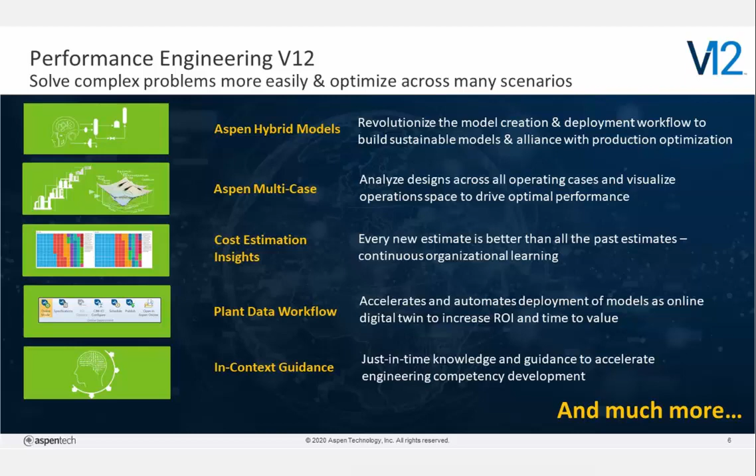Another revolutionary capability is the in-context guidance that provides users access to best practices and tips and tricks that are relevant and helpful to the specific task that a user is trying to accomplish from within Aspen HYSYS or Aspen Plus. This, we believe, will help further accelerate competency development for our users. And again, these are just a few of the innovations. There are very many in the V12 release.

Now, let us take a quick look at a few of the challenges faced by the process industry. One key challenge is the ever-increasing need for greater collaboration between the dispersed workforce and the need for better information sharing between design and operations. There is growing pressure on productivity from increasing market volatility. Now, these two challenges, of course, have heightened further with the pandemic.

Another major challenge for the industry is the impending loss of knowledge and experience as a large segment of the senior operations staff retire from the workforce. And finally, there is the increasing challenge of maintaining competitive edge while achieving sustainability goals. These long-term and short-term challenges can be effectively addressed by harnessing the power of artificial intelligence.

And AspenTech's approach to enabling you to leverage this power is by embedding artificial intelligence in our solutions so you wouldn't have to do it yourself. These solutions use the data from across your processes and assets and then apply a combination of data insights techniques and domain expertise to deliver deeper insights into your processes, give guidance for better decision making, and automate your workflows.

By data insights, we mean various machine learning and advanced analytic technologies. Domain expertise involves first principles engineering and about 40 years of AspenTech's real-world expertise in solving process engineering challenges. This results in a fit-for-purpose, domain-specific AI-enabled application that really delivers measurable returns. And this is really what we mean by industrial AI.

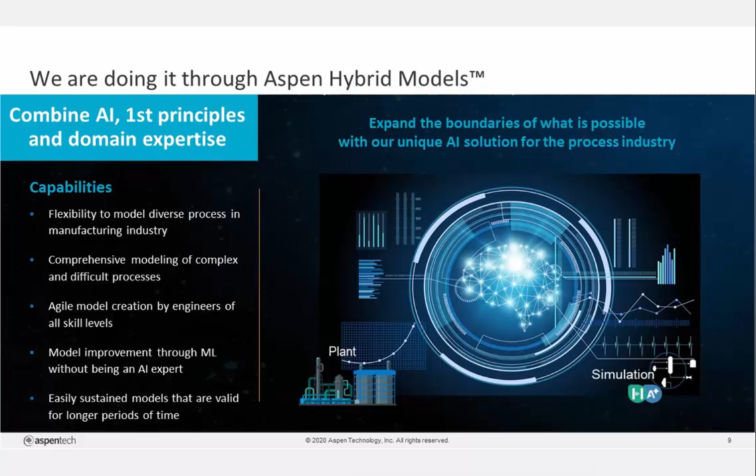Now, let us take a deeper look into what really are these new Aspen hybrid models. One good way to understand the hybrid model is to first look at the conventional pure first principles based models. First principles meaning models built based on the fundamental physics and chemistry of the process. These refer, of course, to the conventional process simulation technology. As we all know, this technology requires some expertise to use and requires some time and effort from the user to create models. In certain cases, they may also prove to be insufficient in modeling certain niche or complex processes.

Now let us look at the pure machine learning based models. These models, on the other hand, require a tremendous amount of good data. Unlike first principle based models, pure machine learning based model predictions may not conform to real world physical constraints and principles of mass and energy balance. In some cases, these models may also be hard to interpret.

Now, this is where hybrid models come, combining the best of the other two modeling technologies. It brings together AspenTech's decades of domain knowledge, the first principles-based modeling techniques, and at the same time, it brings in the machine learning and AI technologies to overcome the limitations of conventional simulation technologies. So this is how hybrid models enable development of self-sustaining fit-for-purpose models that can be used with confidence across an asset's lifecycle.

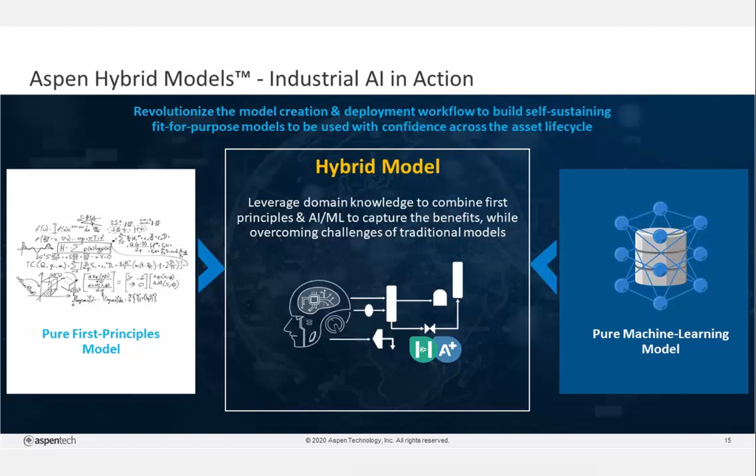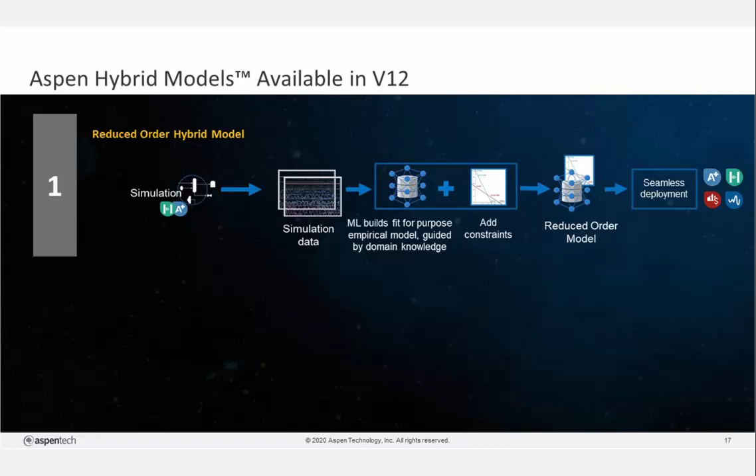In V12, we are enabling users the option to develop two types of hybrid models. The first one is what we call reduced order models. As depicted in this slide, the models use simulation data derived from simulation models in either Aspen HYSYS or Aspen Plus to build machine learning models that are guided by AspenTech's domain knowledge and constraints such as mass balance checks. These reduced order models have the required agility that makes them perfect for deploying in Aspen HYSYS flowsheets, for developing plant-wide digital twins, or developing accurate nonlinear planning models, which can be deployed in Aspen PIMS-AO.

The second type of hybrid models are what we call AI-driven hybrid models. These models can take in data from a variety of sources, such as operations data, lab data, pilot plant data, or simulation data. Like before, this data is used to develop machine learning-based models that are guided by AspenTech's domain knowledge and constraints such as mass balance checks. In addition, these models can leverage first principles to compute parameters so that they can augment the data pool.

These models are ideal for deployment in Aspen HYSYS flowsheets for simulating complex processes that cannot otherwise be simulated today using conventional simulation technologies. They can help as inferential sensors for properties that cannot be predicted by process simulators. And more importantly, they can be used as digital twins for operational decision support. As you may have inferred by now, Aspen hybrid models deliver deeper insights into both processes and equipment using the power of AI, which is not otherwise possible using conventional simulation technology.

There are very many real-world use cases where this technology can help you significantly. This includes accurate and robust reduced order models for both engineering and operation support. They can help develop non-linear reduced order models that could be used for updating your refinery planning models. And as I said before, they can act as virtual sensors for KPIs. And most importantly, they can help develop robust, large-scale site-wide models.

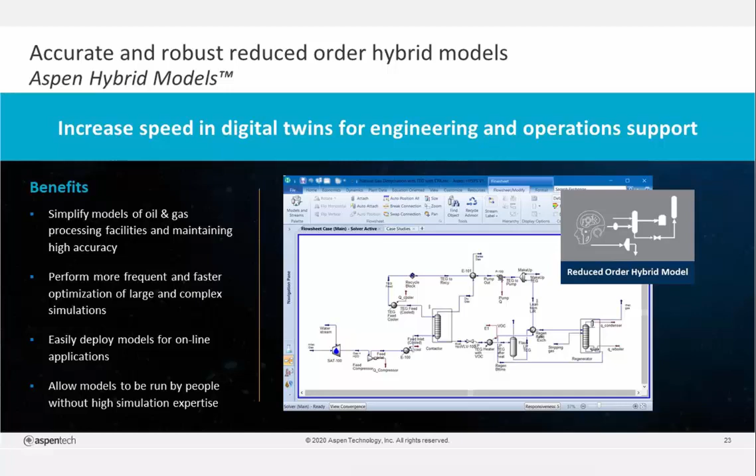So for this given application, we worked with a number of different companies, and this is just a sample of some of the work we did with a large American multinational company, an energy company. And the challenge they were facing was there was a significant amount of effort needed to calculate all of these different gas allocation calculations. It's a very complex model. It takes significant time to solve, and it required a very high level of expertise to do this kind of work. And overall, they were trying to reduce some of their energy use and improve the overall sustainability.

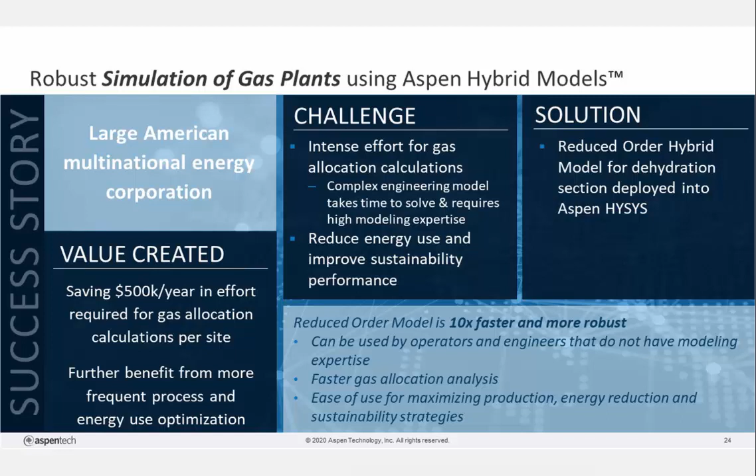So the solution we came up with was a reduced order hybrid model for the dehydration section within Aspen HYSYS. So we built a reduced order model that could be deployed back into the engineering case. And as a result of this, we were able to save about $500,000 a year in total effort required for performing these gas allocation calculations. And we gain an even further benefit of this by allowing this process to occur more frequently. And since this is a very streamlined, automated, and relatively easy workflow, we can do this type of activity really as frequently as we like. And this underlying reduced order model is 10 times faster than the initial simulation case, and it's also more robust. So you get additional benefits through that aspect as well.

Now, the workflow for actually building these, which I'll show you in the product in just a minute, starts first with the data collection and the data definition. So what we're ultimately doing is building a reduced order model based off of an existing simulation case. And in order to build that reduced order model, we first need to have a data set that represents the full operating range that I really want that model to represent.

Now, we could generate that data in a number of different ways. We could take our existing simulation model and run it through, for example, the case study in HYSYS. We could potentially use ASW or other tools. However, we have a brand new product called Aspen Multicase that makes this process very, very simple and a lot quicker and a lot more straightforward. So I'll show you what that looks like in the tool.

But what Multicase allows us to do is not only perform this in a more streamlined and easy manner, but also take advantage of high-performance computing, run these different cases in parallel, and also helps to set up an intelligent design of experiments to make sure that for the range that I define, I'm really getting adequate representation and sequencing the cases in a very efficient and in a very intelligent manner so that I can do this analysis as efficiently as I possibly can.

Now, once this data definition and collection is complete, I can take that model, or all of that data, into my AI Model Builder to perform the hybrid model building steps. So the Aspen AI Model Builder is our brand new product we just released with version 12 that allows really the building, the data cleaning, the validation, and everything else needed to build and eventually deploy one of these hybrid models.

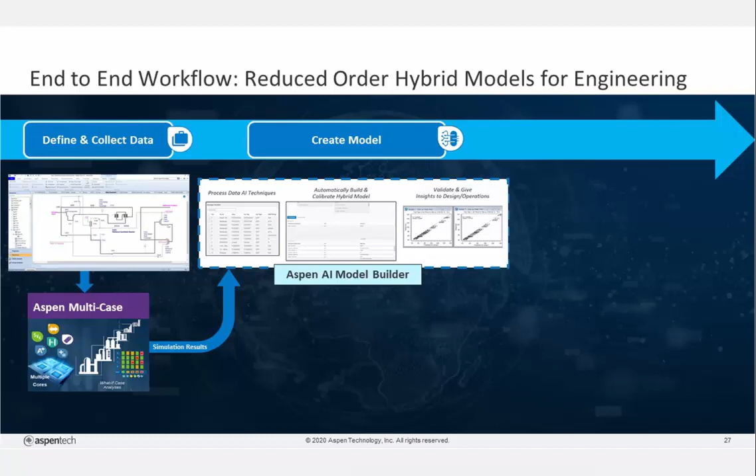Once we finish the model building and the model validation step, we can then begin the process of exporting this model and deploying it into a given end product. So here we'll be using this model within Aspen HYSYS, but you could also think about using this model perhaps in Aspen Plus or online, or as you'll see in another demonstration, how we can also deploy it into the planning world.

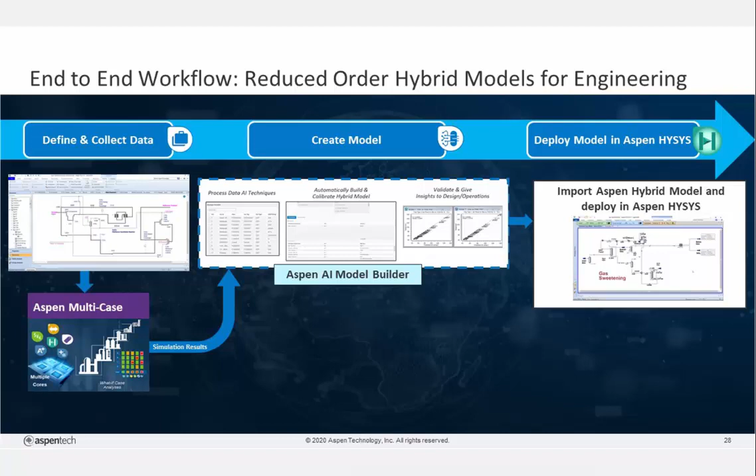So the demonstration that I will show you today is a case where we can build a reduced order model for a gas plant, specifically focused on the gas dehydration section. So we can take a large portion of the HYSYS flow sheet and simplify it down into a form that we build in a reduced order model and deploy right back into the simulator. That again allows us to improve the overall performance, stability, and robustness of the model as a result. So with that, I will transition over to the demo and show you what we actually do to build one of these models.

Okay, so what you're seeing here is a HYSYS model of a gas plant, and I'm specifically focused in on this gas dehydration, compression, and NGL recovery section. So what we're actually going to do is build a reduced order model that represents the full scope of the simulation case that I'm showing you here. So all of these distillation columns, streams, heat exchangers, pumps, compressors, everything you see contained in here will be simulated by that one single reduced order model.

Now to make things a little bit easier, if I go back to my parent flow sheet here, I have everything contained within this flow-1 subflow sheet. So everything you see in here is within that subflow sheet, which will make things much easier when I get over to Multicase for actually generating this data. Now, I'll go over to Multicase and we can begin the process of generating all of the data that we need to build our reduced order model.

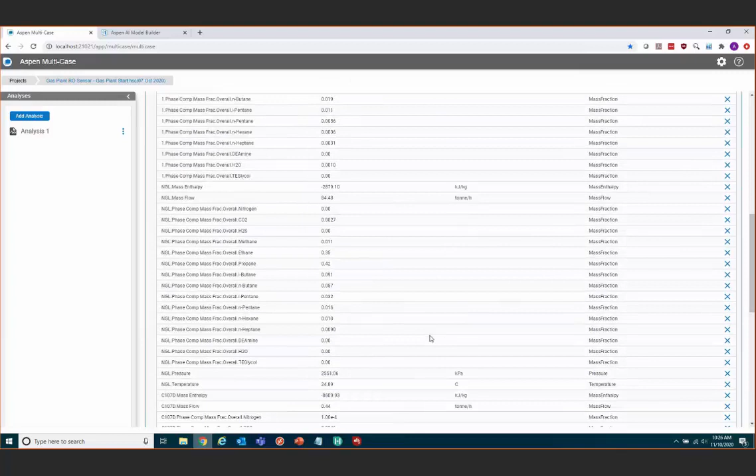Now, if you recall in that HYSYS case, I was saying that that entire section of the flow sheet I want to focus on is contained within that flow-1 sub-flow sheet. So within Multicase, all I need to do is click this button here to select an equipment and select my flow-1 as my focus. And after I do that, this entire grid within Multicase is automatically populated with all of the independent and dependent variables I need to build my reduced order model. So what we've done is automatically selected the minimum equations or the minimum variables needed to build this reduced order model.

I have all my temperatures, my pressures, flows, and compositions on all of my boundary streams. I have the option of adding more variables if I wanted to include anything within the internals of that subflow sheet or perhaps other types of specifications on these streams or units. But right now I have all the information I need to build this model.

So again, I've already run this on my actual machine, just in the interest of time. But if I open up this monitor form here, you can see I ran about 1,000 cases, and this took just over 12 minutes, which is an enormous improvement by using this multi-case technology. So I mentioned briefly that multi-case allows us to take advantage of high-performance computing, and we can also run all of these different simulation cases in parallel after I've set up my lower and upper bounds.

Within this configuration menu here, I have options of setting how many parallel runs I want to do. Of course, this is determined largely by the number of CPUs I have available. This is just running on my laptop, so I have a quad-core CPU here, 4 CPUs. But you could also envision using this on a more powerfully spec'd machine, desktop, or even a server, and you can really achieve very, very quick results executing thousands of simulation runs.

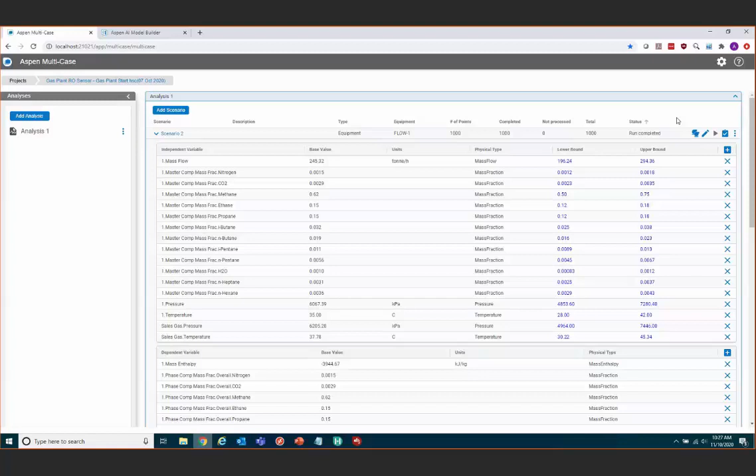Now, once this is complete, I can export all of this data from multi-case and begin the process of building this hybrid model within the AI Model Builder. So I'll switch over to my other tab here, which is the AI Model Builder product. Now, as a reminder, this is a SaaS product that lives on the Aspen Cloud. So AspenTech hosts all of this software, and you simply log in and use it using your unique set of credentials. So I would navigate to aimodelbuilder.aspentech.ai, and I would begin the process of building my hybrid model.

So again, in this case, I've already set up this configuration, but I'll walk you through the different steps involved so you can see how simple and straightforward it is to truly build one of these reduced order models. So I've gone ahead and opened one of my projects, and I want to point out a few things along the way. What you'll see within the product here is we have a step-by-step workflow up along the top, starting first with import data, followed by manage variables, clean data, build model, and then lastly validate the model. So these are the 5 different steps I need to follow to successfully build this hybrid model.

So what I would do is first, on the import data page, upload the data that I just exported from multi-case. I've already done this, so I'll go ahead and proceed to the next step. And then we're brought to a manage variables page. And on here, I can see what are all the variables included within that data set that I just uploaded? What's the variable name? What's the alias? Is it an independent variable? Is it a dependent variable? What's the physical type? And also, what are the units?

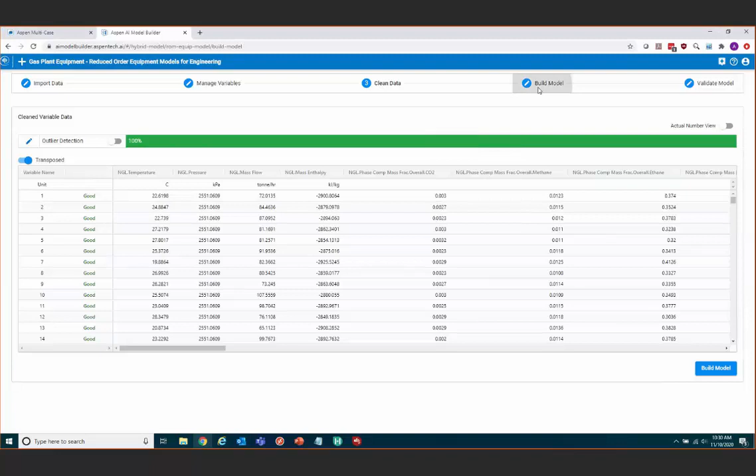The next step is to proceed to the build model page and review the feed streams and the product streams that are coming through this individual hybrid model. And again, this is another place where the power of multi-case really comes through. All of this is automatically set within the AI model builder once I upload that multi-case file.

So multi-case is able to tell us what are the feeds to my model, what are the products, what are the temperature, pressure, flow, composition, and all the other specifications that I need in order to build this reduced order model. And if you think back to some of the items that Sandeep was talking about previously, this isn't just a strictly data-driven model that we're building.

We're also including that sort of first principle augmentation and some of those constraints from the real world, such as a mass balance. So it's important for us to have these types of variables for temperature, pressures, flows, compositions, and everything else so that we can ensure the model we're building is truly in mass balance and it's not violating any of these real-world constraints.

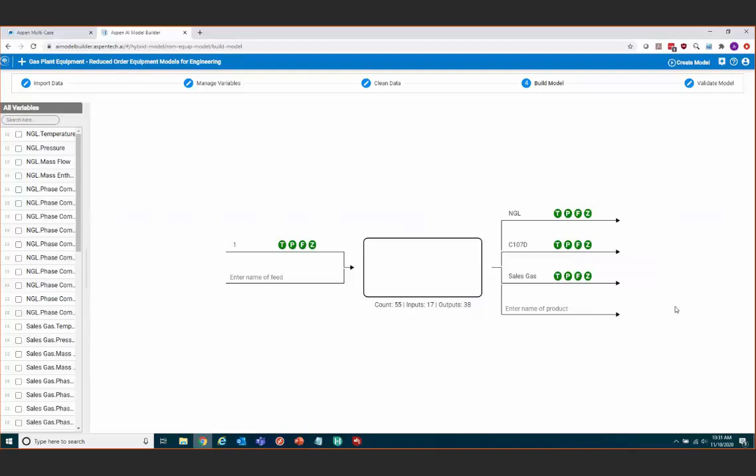So at this stage, I would simply review the information that multi-case had set. I could alter this if I chose to, of course, on any of these different streams. I could add different variables if I had perhaps some other variables included in my initial multi-case model, and I could make those kinds of changes before I actually create that model.

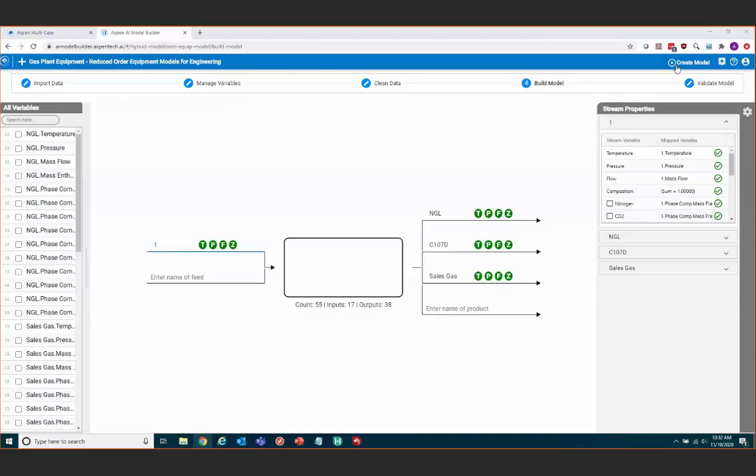Now, once I'm satisfied with that, I have all of my configurations set up. I would click on this Create Model button, and it would proceed to the Validate Model page once that model is built. Again, in the interest of time, I've already created this model, but I will show you all of the results that we can observe.

So after clicking on that Create Model, I can now scroll through this and first look at all of these different parity plots for my individual case. And what these parity plots show me is along my x-axis, I can see the observed value, and along my y-axis, I can see the predicted value from the hybrid model. So of course, the closer I am to this 45-degree diagonal line, the more accurate my model is. And the higher my R-squared value, the more accurate my model is as well.

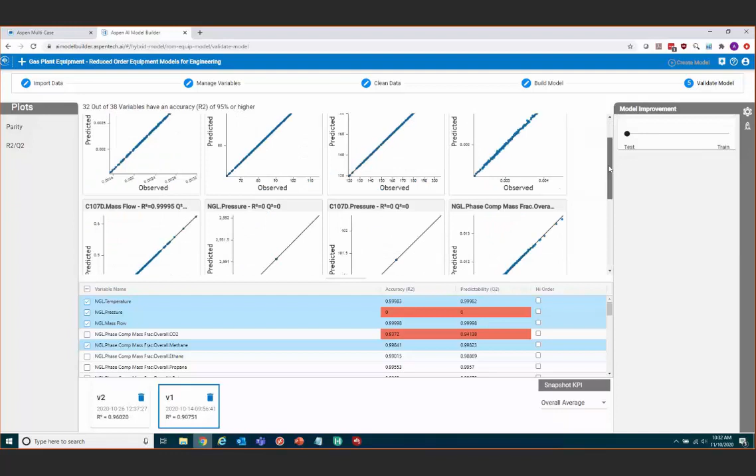So I could go through this process of observing these different graphs, looking at these different R-squared values, and I have a table down here to toggle different ones on or off, and I can get a general sense of what my model is predicting. Now, what happens if these results aren't great, or if the model I've built isn't very accurate? Well, there's a few different things I could try.

First up, we have a few different parameters that you can play around with right on this Validate Model page. One of them is called the high order checkbox here. So what I can do is introduce higher order components for a particular variable. I could do this on one variable, two variables, or theoretically all of them if I wanted to. And what this attempts to do is really up the complexity of the model by introducing more high order components and hopefully build a more accurate model as a result.

So again, all I'd need to do is check this off for individual variables if I wanted to try to build that. It will take a minute or two to actually train that new model, so I've already done that. But you can see down here within this little window here, I have a V1 and I have a V2. And version 2 has introduced a higher order component for this particular variable down here.

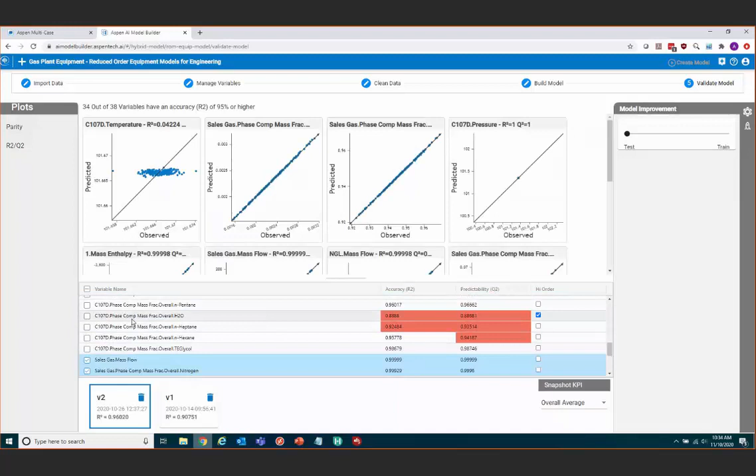I just picked the mass fraction of water since previously it was around 0.8. And now with this new model, we're able to bring it up to about 0.88. And it's also improved the overall R-squared of my model as a result by introducing this higher order component. So that's one tool I have available to me to try improving the overall fit of this model.

I can also change this test and train ratio and see if that has an overall impact on what my model is predicting. I also have the option of going back to clean data, altering some of my clean data parameters, or I could go back to the very start at multi-case and perhaps add additional variables, widen the range on a particular variable, the lower and upper bounds to get a wider sample. And there's a number of different things I could try. And you can see the overall process.

I didn't show it live in this case, but the overall process of setting up this model is fairly quick. After you run those multi-case runs, which take a pretty short amount of time compared to running it locally without multi-case, all I need to do is import that data into AI Model Builder, proceed through some review steps, construct the model, and then view the underlying model at the end of that. So it's a pretty easy and a pretty intuitive process overall.

Now, once I'm happy with these results, and I'm satisfied with what my model is predicting, the next step is to export this from the AI Model Builder and deploy it into HYSYS. So in order to do that, I would click on this little rocket ship icon on the side, and I choose where I want to deploy my hybrid model to.

Now, in this case, we of course support our latest version, version 12, so we can deploy hybrid models into version 12, but we also offer some backwards compatibility as well. We could take this exact same hybrid model and deploy it into HYSYS version 10, as well as HYSYS version 11 through a HYSYS extension. So you have that option available to you as well.

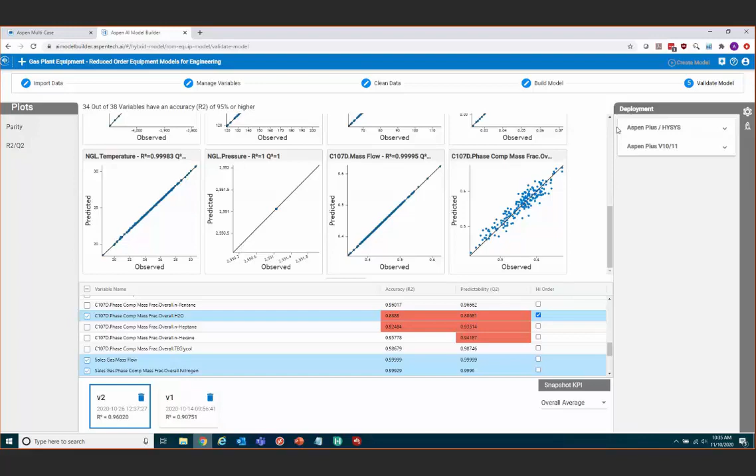Now, after I've exported that model, I would come into HYSYS and I'd begin the process of using it within my flow sheet. So I've already set this up, but I'll show you what the process is for actually configuring this. What I would do is click on the models and streams here, and then the next thing I would do is look for my hybrid model unit operation. So I could either search for this or use it on the external model tab.

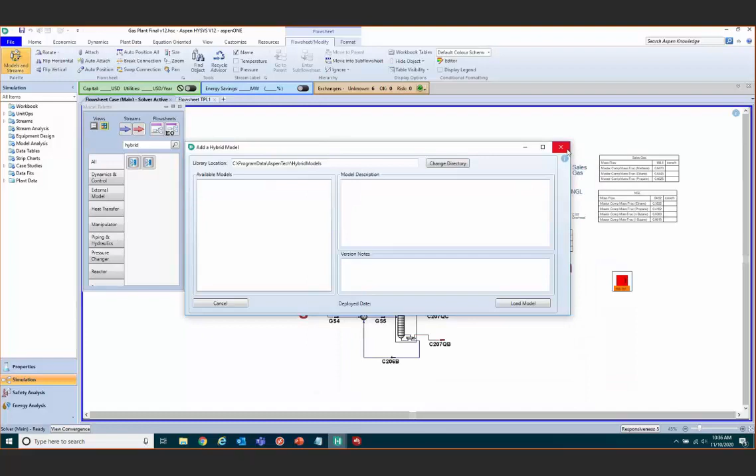And after I drop this on my flow sheet, you'll see that I need to change the directory and select where I have that individual hybrid model saved. After that's saved, I would use it and deploy it the same way I would use any other HYSYS unit operation. And I'll zoom in just on this section up here to show you what this looks like.

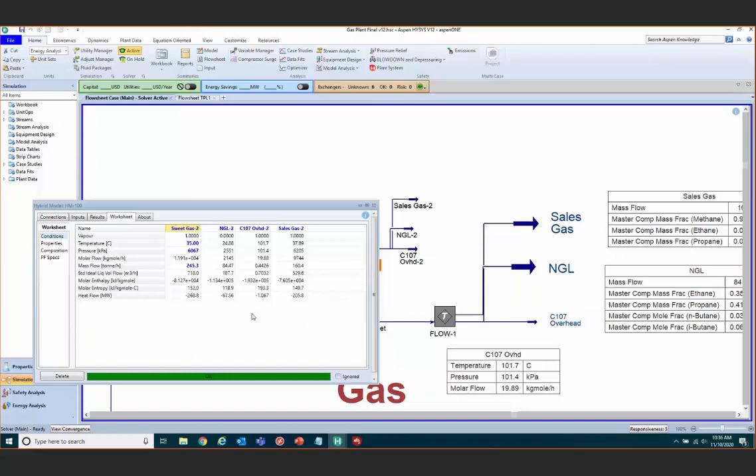So this is the model that I've just built within this HM-100 unit operation. And you'll see I can click on this, and I will use this the exact same way I would use any other sort of HYSYS unit operation. I would connect my feed streams, my product streams. I have different inputs perhaps depending upon the type of model. I can view the results if I have specific parameters in there, and I can see the stream results and integrate it within a flow sheet the same way I would integrate any other type of model.

Now, I've already validated this model within the AI Model Builder. So the next thing I could do is start to validate this within the HYSYS case and compare some of these hybrid model results with the rigorous HYSYS model results. So I could review, just as an example, I've included this stream, the C107 overhead stream down here. This table is representing the rigorous HYSYS results for the temperature, pressure, and composite molar flow calculations.

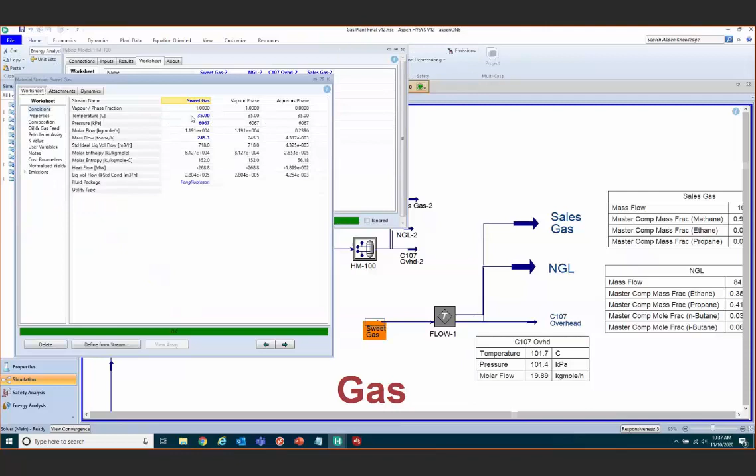Now, I can review these same results within the HYSYS stream up here for C107 overhead to see the temperature, pressure, and molar flow. And you can see they're nearly identical. I could then make a change into this case, say change my temperature from 35 to 40 degrees C. You can see the hybrid model solves pretty much instantaneously. And then I could make the same change in HYSYS. And this will take a little bit longer to converge, but it's a pretty small step change, so it doesn't take too long.

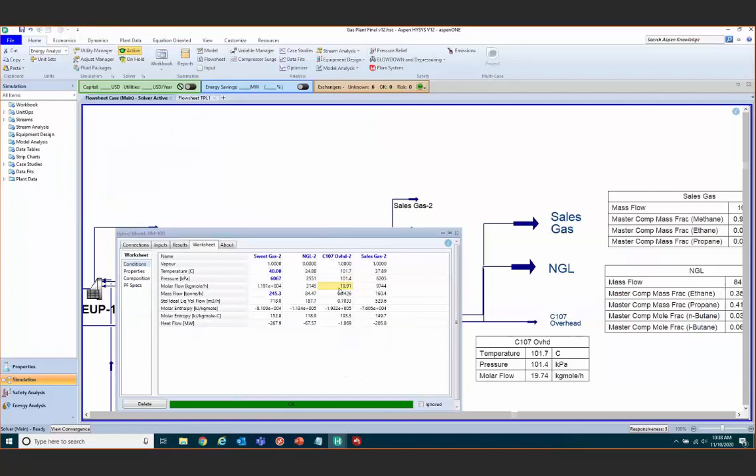But then I could view, again, the new predictions. We're still predicting the temperature and pressure at 101.7 and 101.4 in both cases by observing these two tables. And the molar flow is 19.91 in the hybrid model and 19.74 in the rigorous model. And I could keep doing this activity, comparing different model results, comparing different stream results until I'm really happy and comfortable with what the hybrid model is predicting.

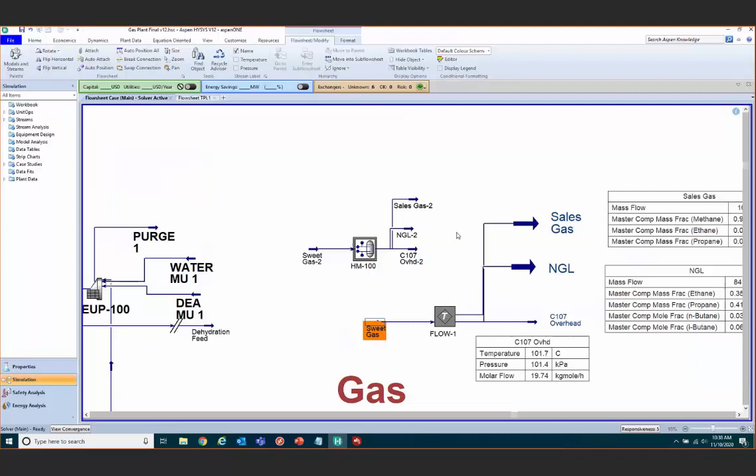So just to briefly recap what I just showed, we started first in multi-case. We generated all of the simulation data we needed to build our reduced order model. We then exported that data, brought that into the AI Model Builder, where we used that entire data set to build a reduced order model that, again, represents this entire section of the HYSYS flowsheet. We then created that model, validated that model, exported it, and deployed it back into HYSYS, and used it in HYSYS the same way we would use any other HYSYS unit operation.

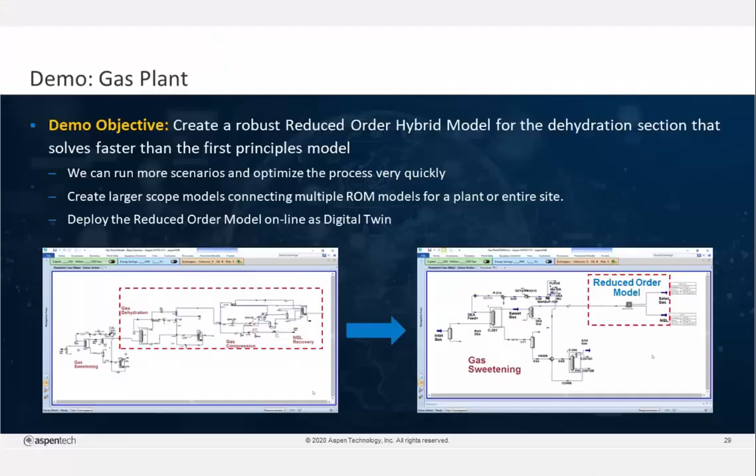So that really concludes the first of the demonstrations, and I'll switch back over to the slides now, and we can start the process of going through our next demo.

So the next demo I'd like to share with you today is how we can build one of these reduced order models and deploy it into the planning world, using it specifically within Aspen PIMS AO. So the ultimate goal here is to build as accurate of a model as possible, to help increase our margins and also save time. So by doing this, we estimate there's a potential benefit of somewhere around 10 to 25% of a planning optimization benefit, which translates to around 3 to 15 cents per barrel

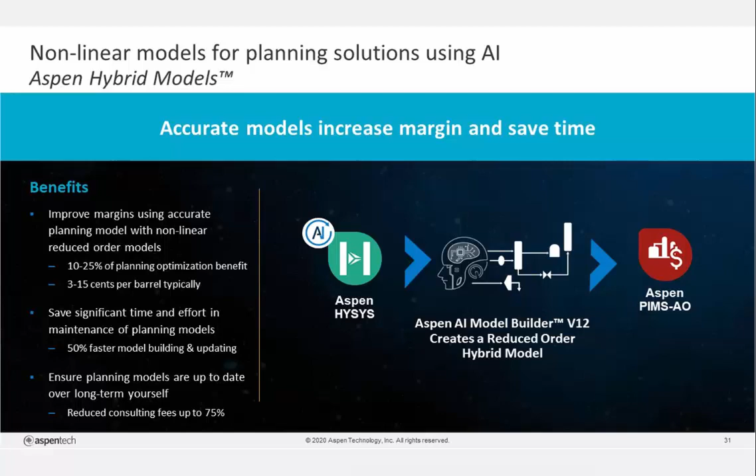typically. Through this intuitive and streamlined workflow, we can improve the overall time for building and updating these models by as much as 50%. And since it's a relatively streamlined, intuitive and automated where possible workflow, this is really applicable to any type of user. So ultimately, we could look at how we could reduce consulting fees on these types of projects by up to a total of 75%.

Now, the actual process of building one of these, which I'll show you in a minute, has been validated with a number of different companies. And I'm showing you one example here where we worked with a European energy multinational corporation. And the challenge they were trying to address was to build a more accurate and a more reliable planning model. And their current planning model had a number of missed opportunities using the conventional base delta LP models within PIMS.

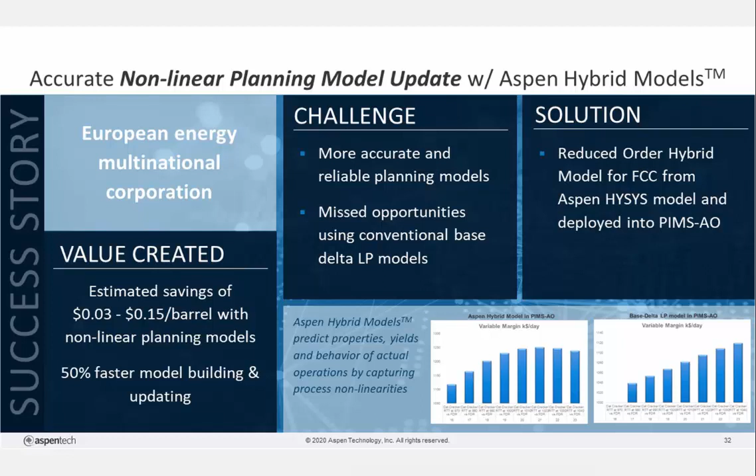So our solution was to build this new reduced order model. And we could use that reduced order model and deploy it within PIMS-AO to have a more accurate model as a result, and also showcase some of the nonlinearities within our planning case. And we had an estimated savings here between, again, 3 and 15 cents per barrel, with a 50% improvement on time for model building and model updating.

So the overall process for doing this is very, very similar to what I just showed you. Most of the differences will be highlighted on the deployment side of things. So we'll, of course, first start with the data definition and the data collection, again, using multicase. This is all based on an existing HYSYS simulation model. So we'll use that simulation model to generate all of the data that we need in order to build our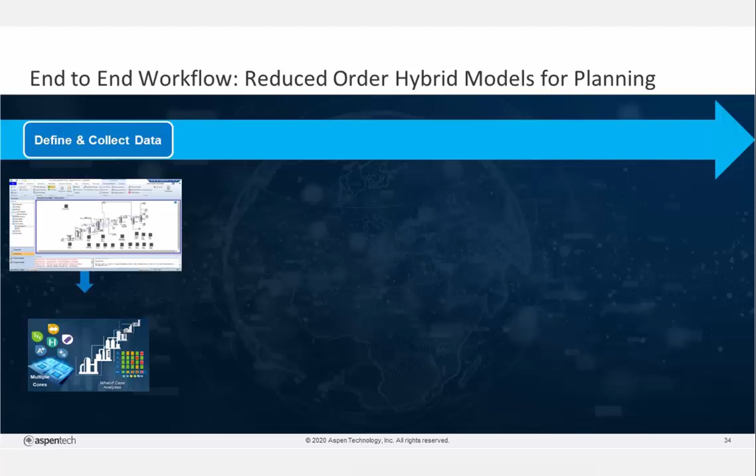hybrid model. We'll then take all of that data into our AI model builder, where we do that process again of data conditioning, data cleaning, model building, and final model validation. We can then deploy that model down into PIMS-AO. And we have a very simple and a very streamlined workflow for embedding that right within an existing PIMS worksheet.

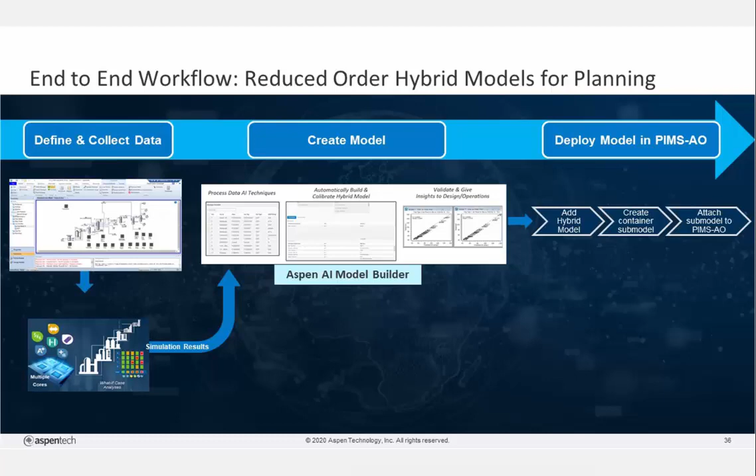So the case that I'm going to show you is a case where we have a rigorous FCC model in HYSYS, and we're going to build a reduced order model that represents that rigorous FCC model. And we're going to deploy that hybrid model, or that reduced order hybrid model, within Aspen PIMS-AO.

So the demonstration that I'm going to show you is going to focus exclusively on the deployment step into PIMS-AO. That overall workflow for data collection, data generation, model building, all through multicase and eventually AI model builder is exactly the same. So I'm only going to highlight the end portion where we're looking to actually use this model within PIMS. So let me share my screen again, and we'll transition over to this PIMS model.

So the actual process of embedding this hybrid model and using it within PIMS has been greatly improved with our version 12 release. So the way that we do this is we first go to the external model tab within PIMS, and we'll add this reduced order model as an external model to my PIMS case. So I'll go ahead and right-click on this, and we'll add our external model, and I'll select hybrid model as the model type from this new form.

I'll then browse, and we'll go to where I have saved that hybrid model that I built. So when we build the hybrid model for planning, we deploy it using this XLP format that can be easily deployed within PIMS-AO. So I'll go ahead and click on that, click on OK, and now we have our hybrid model within PIMS. The next thing I need to do is to create a PIMS submodel container so that it's easily ingested by this PIMS model.

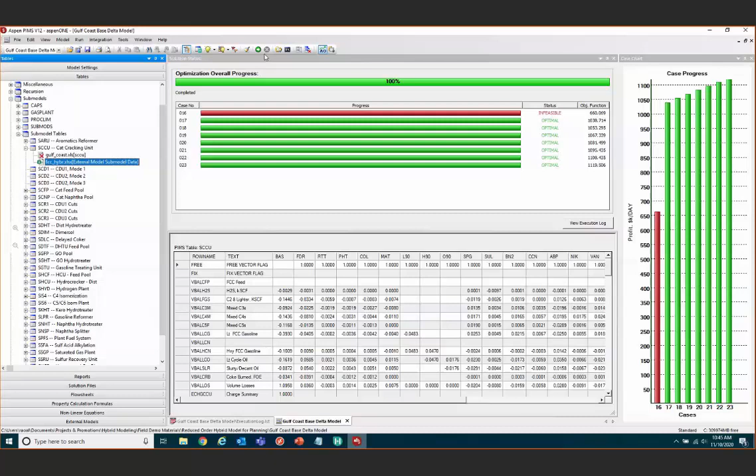Now I'll run these models again, and what you'll see is really the change in response from using that original base delta model and this new reduced order hybrid model. And what you'll find is the overall profit prediction will be higher, and on top of that, the nonlinear response will be observed in this graph over here, showing the cases and the profit per thousands of dollars per day. So I'll give this just a few seconds to complete the run here. It shouldn't take more than another 10 to 15 seconds.

Okay. And you can already see as these results are coming in, I know this text is a little bit small, but you can already see within case 19, for instance, we're producing a higher overall profit already at 1,221 thousands of dollars per day. Previously, the highest was 1,119. Now, we just have one more case that needs to complete, and there we go. And now we can see that previously we had an infeasibility at case 16 for that set of inputs. That result is now feasible using this new reduced order hybrid model.

And the overall trend we can observe here is showing that nonlinear behavior that we would expect. So this is actually predicting that overcracking peak within that unit, and we're able to observe that within our planning model here. Now, we've predicted that nonlinearity, and we've also predicted an overall higher profit prediction as a result of this new improved reduced order model. And again, recall previously we produced about 1,119 thousands of dollars per day. Now we have a maximum at case 21 at 1,238 thousands of dollars per day.

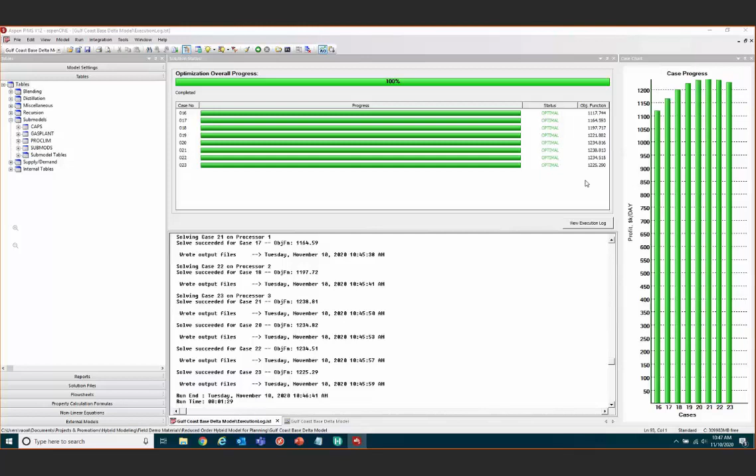So just to recap what we've done, I didn't show the beginning portion, but we started with first generating this data in multi-case. We then brought all of that data into our AI model builder to build this reduced order hybrid model. And then we took that reduced order hybrid model and we deployed it within PIMS. And you saw how easy and how simple it was to deploy that and run it all within PIMS. And as a result, we're able to observe some of these nonlinearities and also produce a higher overall profit prediction.

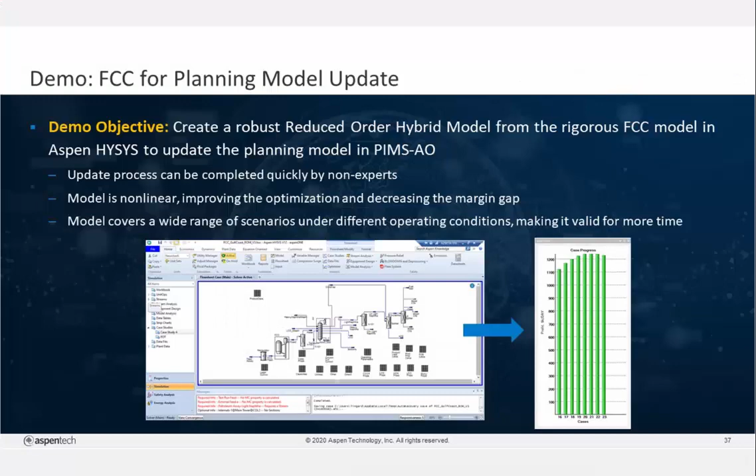So I'll transition back to the slides now. And the next thing I'd like to cover is just that second type of hybrid model that Sandeep was covering at the beginning. So we talked a lot about the reduced order hybrid model, and I showed you two different demonstrations of how we could use these reduced order hybrid models within the simulation world as well as the planning world. Now, the next one I want to talk about for a couple of minutes is this AI-driven hybrid model.

And really the main difference here is that we're still building this hybrid model, but our data sources may be different. And we could be looking at perhaps using lab data, plant data, field data, simulation data, or really a combination of all of them to build this hybrid model. And one of the differences that we're doing here is that in many cases, we're actually building a brand new unit operation. So we can take all of this data that we ingest into the AI model builder to build, say, a brand new membrane unit operation, or perhaps other types of unit operations that don't exist currently within HYSYS.

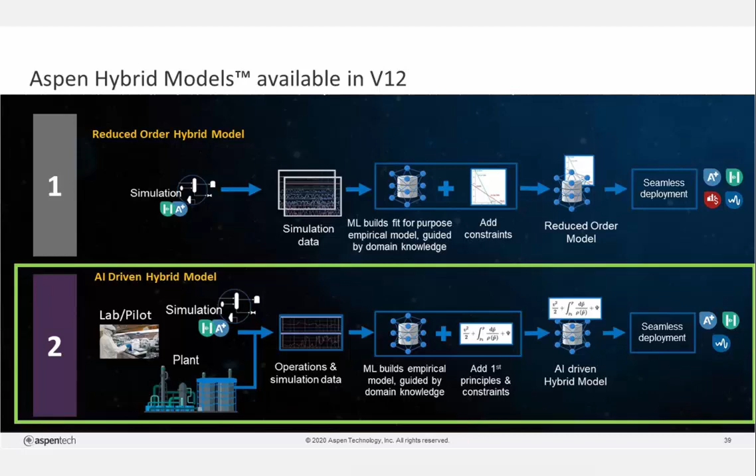We can use this AI model builder technology to build these brand new unit operations in a very streamlined and very easy way and deploy them down into our simulation tools and use them the exact same way we would use any other type of unit operation. It would look very similar to what I just showed you for the reduced order model case.

Now, we've also validated this technology with a number of different companies, and one I'd like to highlight here was a national oil company that we worked with in the Middle East. The challenge they were facing was difficulty meeting anode grade pet coke specifications. They didn't really have a great model to meet these specifications, and building one of these very customized models had a super high cost and required a significant amount of effort.

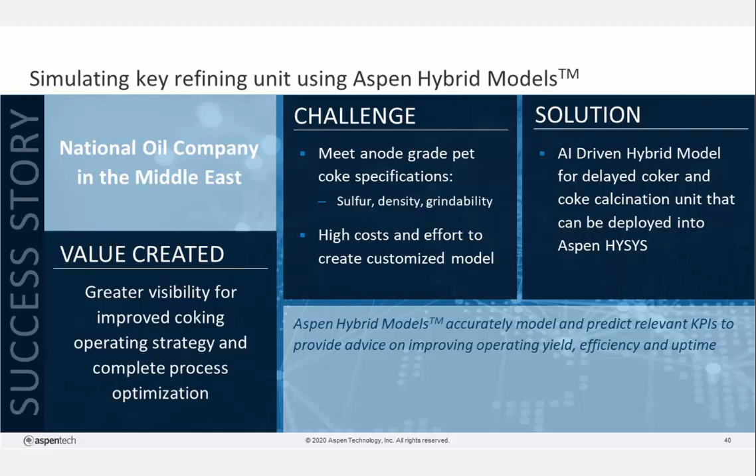So the solution we arrived at was building an AI-driven hybrid model for a delayed coker and a coke calcination unit that we could deploy right back into HYSYS. The user didn't have to go through this long and arduous process of building a very customized model. Instead, we could use the AI model builder technology, specifically the AI-driven hybrid model, to build this custom model and deploy it right inside of HYSYS. As a result, we gained greater visibility for improving the coking operation strategy and a more complete picture for process optimization.